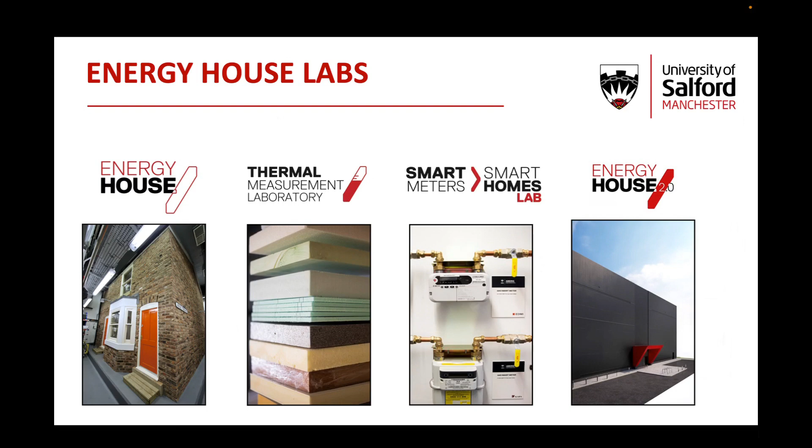Some of you may be familiar with the original Energy House, which was constructed in 2011. I'll talk a little bit about the work we've done there, because there's been a decade or more of work in there. And our recent Energy House 2 facility, which scaled up the original principle.

The reason we decided to go this way is, certainly around 2010, we were looking at things like the Green Deal, CESP, and we saw there was an opportunity to look at existing homes. I think still retrofit, particularly for the insulation market, is still a massive challenge. What we identified is there was a problem of assessing retrofit solutions, because really there's two ways of doing it: taking a piece of insulation and testing it in isolation, which we know is not really the problem - the insulation almost invariably works in that context. Or doing a field trial, which can be really expensive, difficult to do, and intrusive in people's homes.

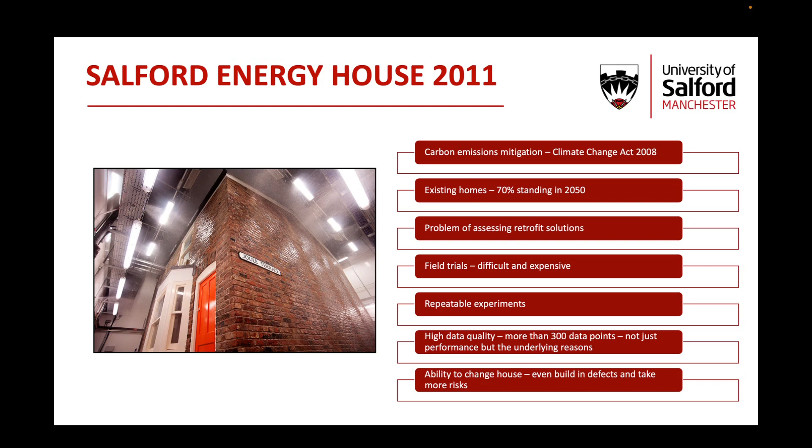So what we can do is conduct repeatable experiments by controlling the temperature. We can keep the temperature at a fixed state, un-retrofit the house, retrofit the house - two different states - and test them under exactly the same conditions with high quality data. This also gives us the opportunity to look at things that may not be proven as yet, or even look at the impact of defects.

We first started our first major project in retrofit with an organisation called Saint-Gobain. They're the world's largest manufacturer of construction products. This was to do a whole house retrofit using a variety of products. What we did was completely retrofit the house, baseline the house, retrofit the house, and take one thing off at a time to see the impact of the varying interventions. This for us is a great learning experience to try and understand what worked, how we measured things, and we've definitely moved on since then.

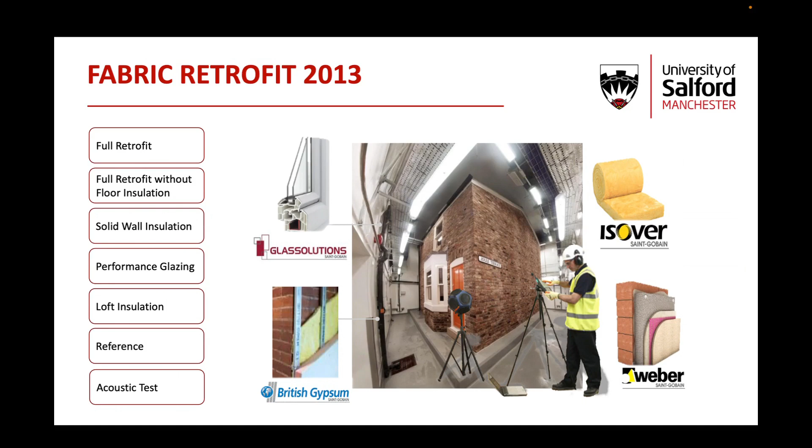Just to recap, we think measurement is really important. I think some of the problems we see in the sector are that we rely sometimes not on measured data, and not on a full understanding of how things actually perform in the field.

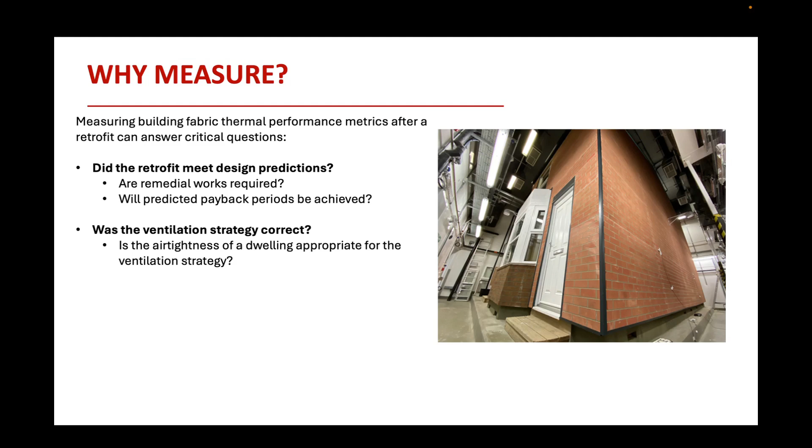So we have a number of areas where we think we can bring real value. First of all, does the retrofit meet design predictions? You can see a whole house retrofit that we've done. Are remedial works required? Will paybacks be achieved? Is the ventilation strategy correct? Is the air tightness of a dwelling appropriate for the ventilation strategy? And issues around health risks - pre-existing risks, have we introduced new risks? Surface condensation and mold growth, overheating.

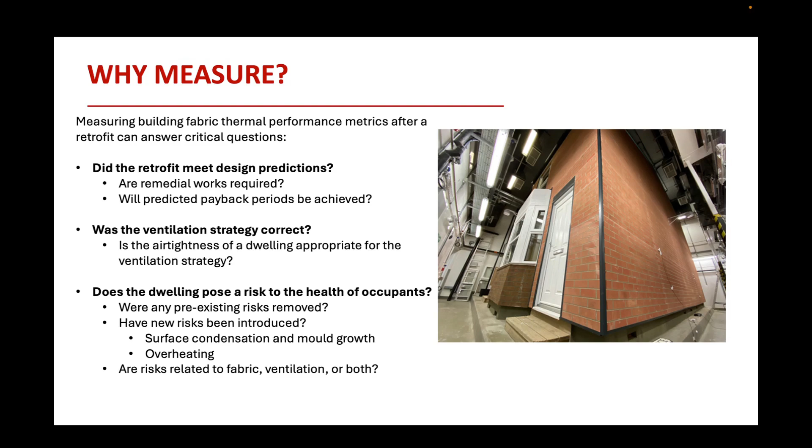Understanding by measuring what those risks are and coming to appropriate solutions for homes is really at the heart of what we do. And we do this in two key ways. I think the first is understanding the whole house heat loss, so the overall performance of a retrofit.

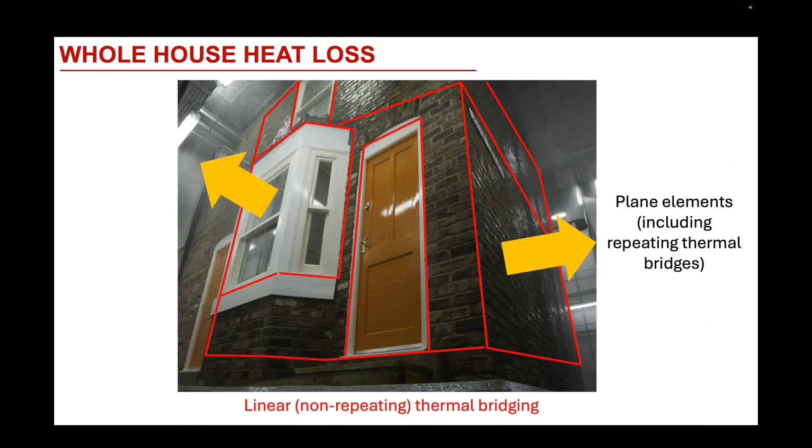That's some around thermal bridging - where are the linear thermal bridges in the install? Understanding plane elements and how they perform, understanding infiltration and air permeability. This gives us a number of methods, and there are new methods. There was a recent project from DESNZ called SMETER about how we can measure houses and understand that they're actually performing in the way that we want them to.

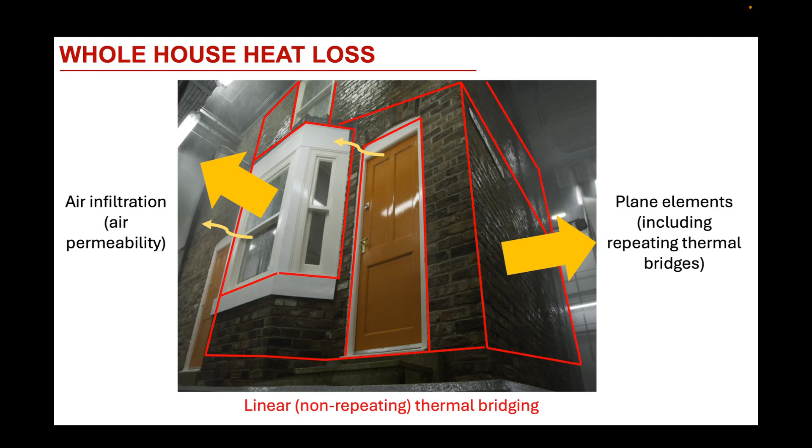That whole house heat loss approach can give us a single number of all the losses and can give you quite a good understanding of how the house performs in the round, and to see if it's meeting its design expectations. The other element that we look at is obviously thermal bridging and the junctions between the thermal elements.

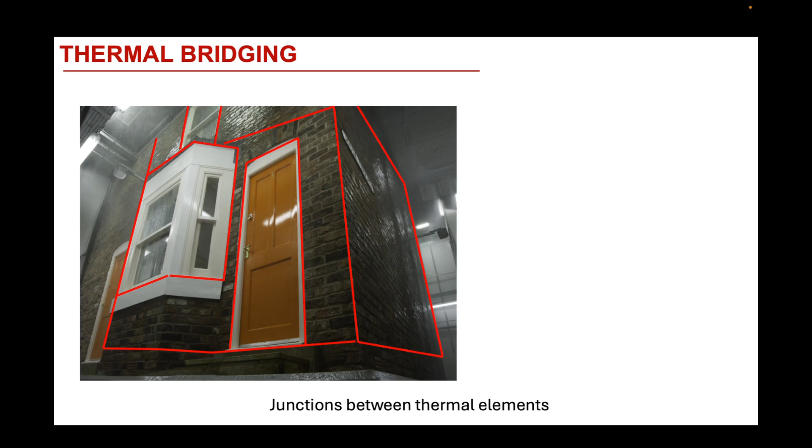So what we see is, sometimes the relationship between product and install, or product detail design and install, is essential. And I think what we do gives us the opportunity to look at how that detailing can be done and then how it might be delivered on site.

We use a variety of tools - the standard things like blower door tests, but we'll also use things like pulse tests. We'll use thermography, co-heating, U values. So we get this very, very data intensive full picture of what we're trying to do.

You can see here in some of the examples that we've given, this is the original there. There we can see the thermal bridges that occur from the design and delivery of a retrofit.

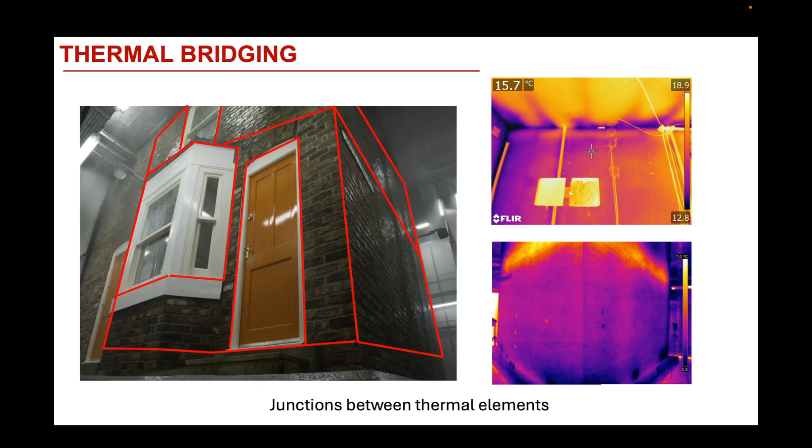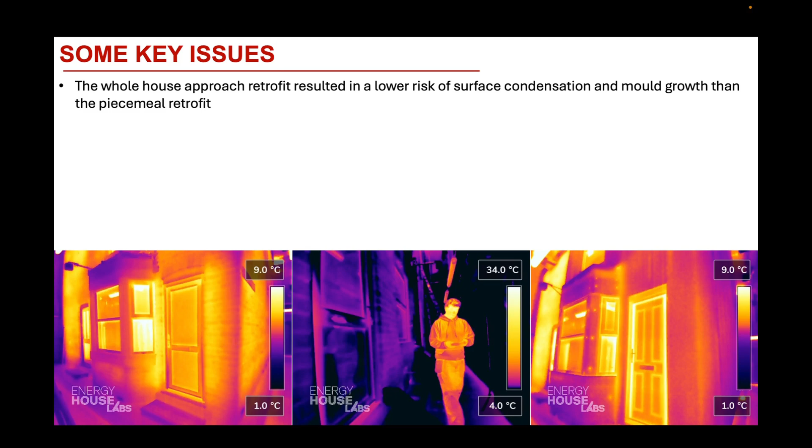So we've just finished a big piece of work. The report is not out yet, but it will be out before the end of the year. In that project we did 20 different retrofit scenarios - 4 retrofit scenarios and 5 heating scenarios, all done in combination. Some of the initial findings with the real detail will be coming hopefully before the end of the year, and if not in January.

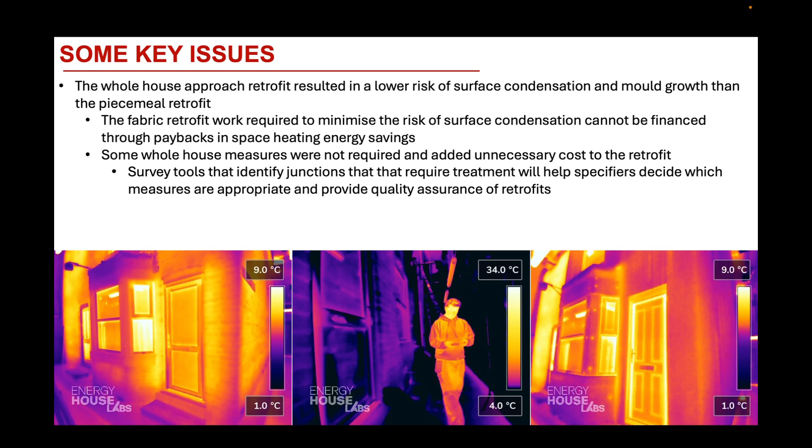I think the whole house approach does reduce the risk as compared to piecemeal retrofit. And I think the issue in terms of payback, it's very difficult to convert those paybacks into space heating energy savings, but actually we should be looking at the co-benefits in terms of quality, in terms of the safety and health of the house.

Some whole house measures are not required, and they did add some cost to the retrofit. In some respects, in delivering retrofit, really understanding what is necessary and what works is driven by understanding the actual performance of things rather than sometimes quite light touch model performance.

I think existing piecemeal retrofits can be converted to whole house retrofits. Piecemeal, in some respects, is not completely off the table, but there has to be an awareness of the thermal envelope and air tightness barriers. So some of the work we're doing is to try and understand what is appropriate - in some respects we suffer from under design, but we can sometimes suffer from over design as well, which actually adds unnecessary cost. Particularly if we're going to get into the owner occupier market, that's a big issue.

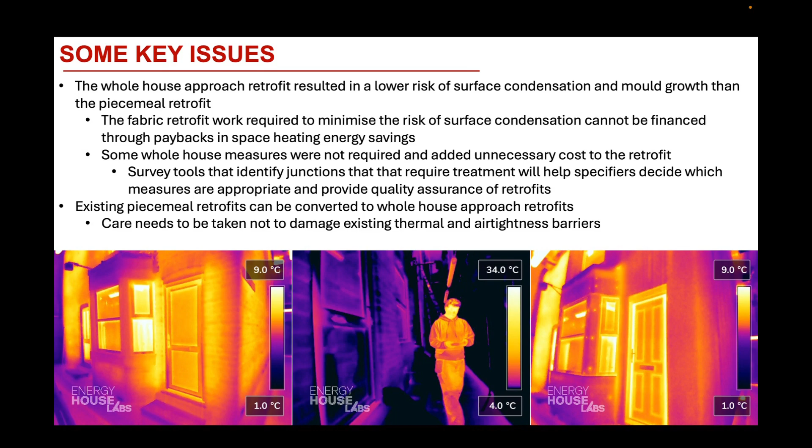We're not just doing retrofit, although it's a big part of our work. We're currently in Energy House 2 looking at 2 future home standards buildings. We're working with Bellway, Saint-Gobain and Barratt, and we're looking at the performance of those properties against the new standard that I think is due out of consultation in a few weeks.

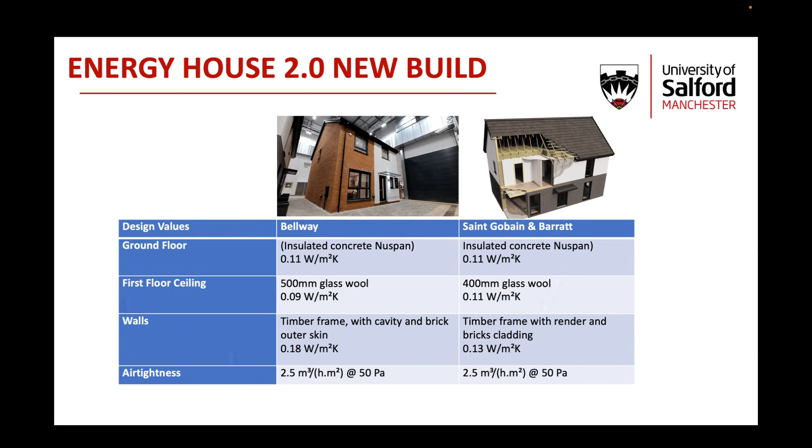And that to us is really important, because I don't think it's been something that the sector has done - to say, we're going to build this, does it work, how can we improve it, what are the installation risks? So we'll be doing baseline testing at the moment, and that will be out very shortly.

So that's looking at U values, aggregated heat loss, air tightness, and using that data to understand where the work needs to be done better. This measurement also gives us an opportunity to build much better models, so more accurate models, because even some of the dynamic models, the assumptions within them can be incorrect.

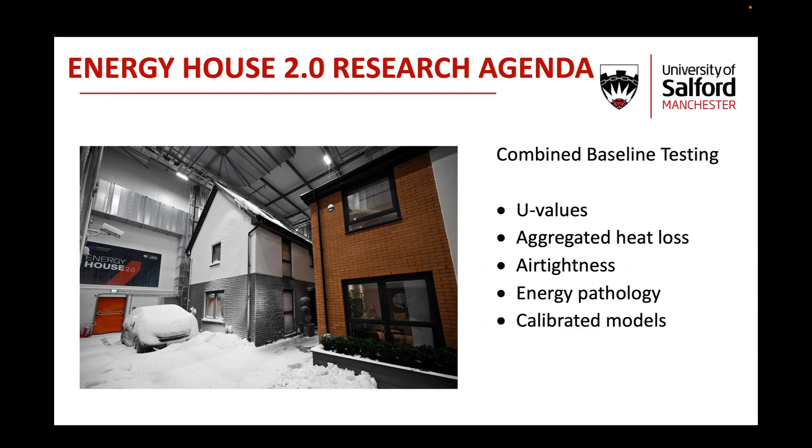So I think largely the message I'm trying to give is actually measurement's getting cheaper. There are places that do it really well. I like to think we're one of them. And actually giving that evidence to the sector about what the right thing to do is essential. And I would say, everything we do is with industry. We work with Rockwool as well, to understand how things are performing and how we can better deliver net zero, affordable, energy efficient and healthy homes.

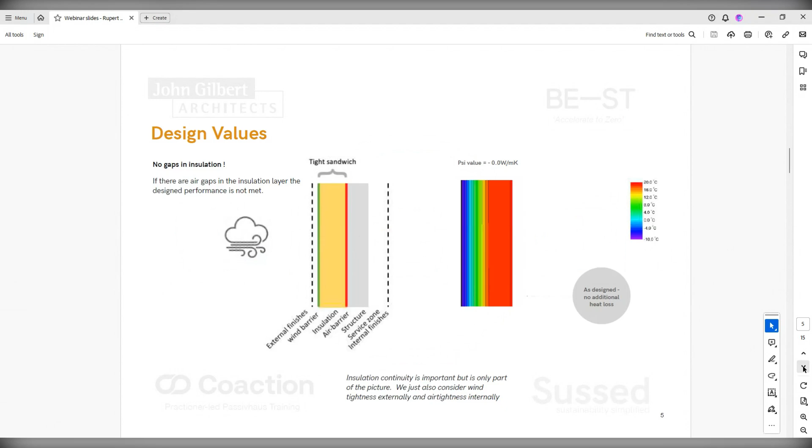Okay, so as designers, if we're using any methodology really, we're basing it on the assumption that it's put together. So if we go to the next slide, if we start to think about potential gaps in that insulation continuity, you can immediately see by the thermal bridge diagram that we get a lot of additional heat loss. So this heat loss isn't included in our design assumptions. So we need to try and mitigate it wherever possible.

I think in Passive House, we're really trying to go for no gaps. There's a reality of sites where there are practical tolerances. So 2 to 3 mil is an absolute. Anything bigger than that, it needs completely filled. Okay, so a through gap here, you can see the heat loss direct through to the structure. So it's quite a significant heat loss.

One of the tools that we've got, if I can go to the next slide, is trying to break that direct connection from outside to inside. So even if not being specific to the type of insulation, if we can break that air path directly through, then you can see there that we've got a significant reduction in heat loss. So by layering up the insulation initially, then in design parameters, this looks quite good.

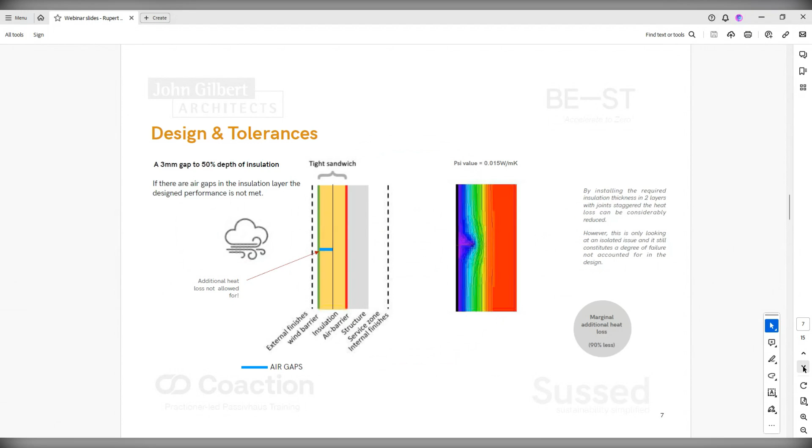The reality is that thermal bridge gap that we've got there might be reasonably insignificant on its own, just to a localized area. The risk is that gap joins another gap and joins another gap, and we get lots of different veins of heat loss running through the insulation. Okay, so next slide.

There's some really good work done on this. It's available on the Passive House Trust website by one of our co-practitioners at Coaction, Mark Siddall, and looks at the effects of thermal bypass. So there's quite a lot to it. There's a really good report. I suggest you take the link here and have a read through it.

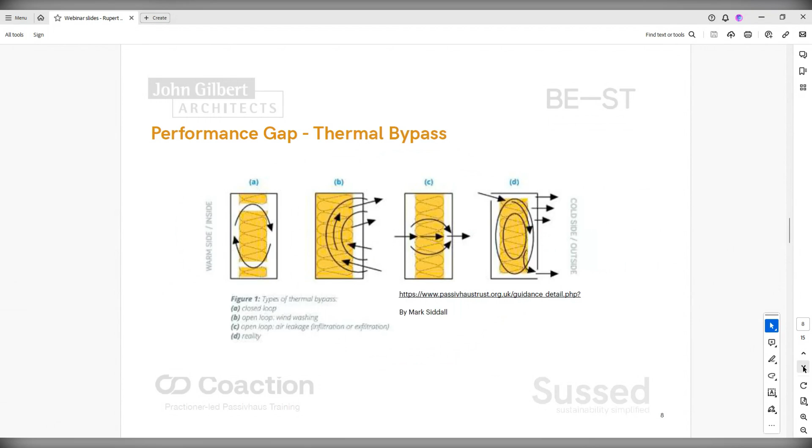But the impact or the devastation, if you like, on the performance of insulation by thermal bypass can be quite dramatic. You know, if we've got a design value, depending on the type of bypass there, you could be 500% more heat loss than what's actually in the design if we've got it poorly implemented. Okay, next slide.

So some examples of this, and this is where we start to think about different products for different uses and how we can actually put these together. So thinking about substrates critically, if we're going to be using rigid boards, how can we actually get those smooth onto a substrate so that there are no air gaps? You can see here finger width air gaps between substrate masonry as a result of mortar snots. The alignment of that block work, if you've got a long rigid board, how you're going to get that on. Essentially, if that gap there links to a gap through the insulation, then you've got a full bypass going on.

The middle picture is a retrofit. So left hand is a new build, middle picture is a retrofit, actually taken yesterday, where the substrate wall is a masonry wall which isn't smooth. And this is something that's happening a lot in the industry, or has been for a number of years, where we've not fully appreciated what the impacts of these air gaps are. So ideally what we want is a nice smooth flat surface for all of this type of insulation to be applied to.

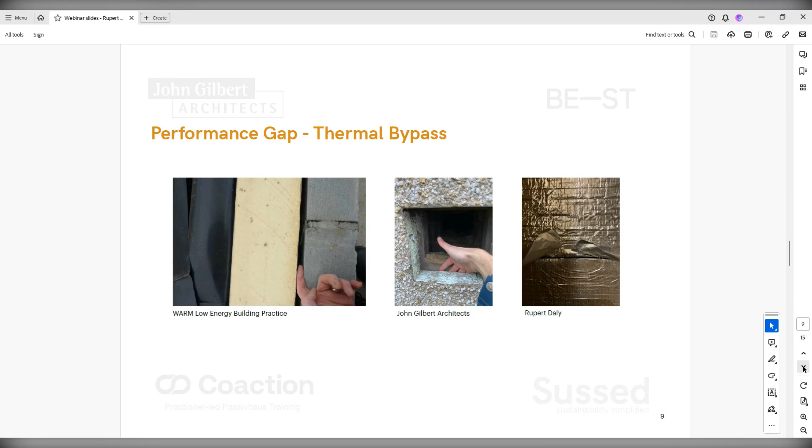The last picture there is just another thing where we're looking at, if we're going to do this work, we want to do it once and we want it to last for the lifetime of the building. So this example here is just some products, when they go in, they're still maturing and there's potential for shrinkage. So where a gap might have been installed tight, it can actually open up slightly over a number of years. So we've got to be careful that the products are fit for purpose for the lifetime of the building. Okay, next slide, please.

So how do we do that? Well, we need to think about the specification, the types of products, the densities of the products, how they can knit together, how they can interface to other geometry and components in the construction. So this example is from one of the projects that we've done through Sussed for other architects for the Passive House schools projects that are happening in Scotland at the moment.

And we can see an overlap here of the insulation layers, so staggered jointing, and a tight fit, because the insulation, whilst it has its own rigidity, it's flexible enough to actually squeeze around all of these profiles. So it's good. There's no performance gap relative to what's been designed, which is what we're aiming for, but there's still room for further improvement.

For example, in this build up here, there's a reasonable amount of off-cut material wastage, partly as a result of needing the battens there to get to the wall ties, to get to the outside for the overall thickness that was required for this actual building to meet the demand. Now products are getting developed, so we could do this with a newer, longer wall tie, which didn't exist at the time, and take away the battens, and more continuity means we might be able to bring down the overall amount of material that's needed in the first place.

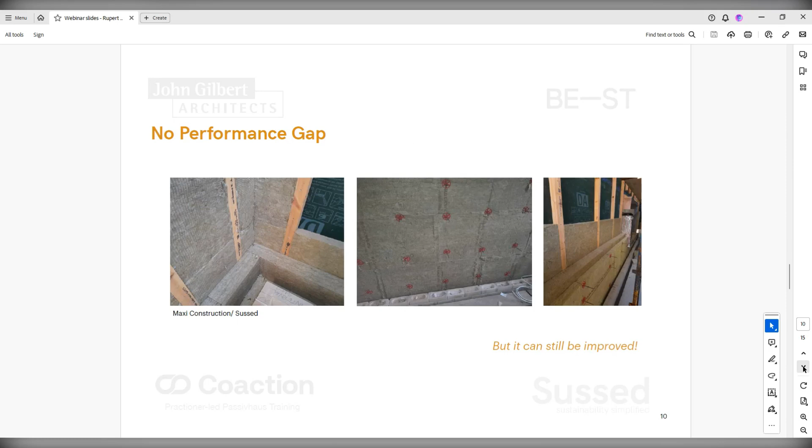It's not only about the products, it's also about the specification and the installation. So knowing which products work well with certain construction types. So in this example, we have timber I-joists used as a support frame for the insulation. There needs to be a bit of thinking about the geometry for that. Is the insulation flexible enough to get around the gaps at interfaces, and also can it be cut? It can be cut obviously, but getting it cut effectively, neatly, accurately on site is quite important.

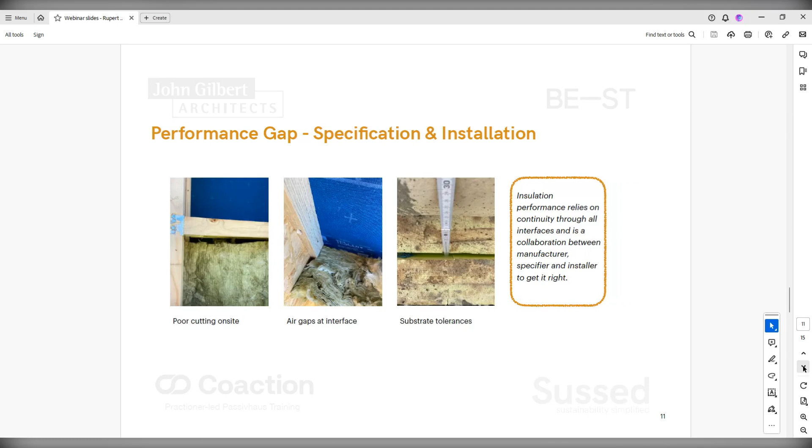The last picture here is really thinking about where it often emanates from, which is the condition of the substrates. So if we have a rigid board requirement, the absolute flatness of that substrate is critical to getting the boards to actually interface with each other and align up with the adjacent components as well.

Okay, next slide, please.

So we've got to think about how we ensure that the workforce can actually implement this work. So we've got skilled workforce, we've got semi-skilled workforce, and thinking about the right tools for the job, training the people to understand what is important about insulation. We don't just throw it up there into a gap. It needs to fit nice and snugly. We can do that really with the proper and suitable insulation products.

We can actually get these cut on site with relatively basic tools if there's a reasonable level of skill and care involved. There are other tools available which are more specialist, which can also help facilitate the accuracy of cutting. But beyond that, maybe we need to take a step further back and say, well, how can we actually reduce risk by minimizing the need for cutting in the first place?

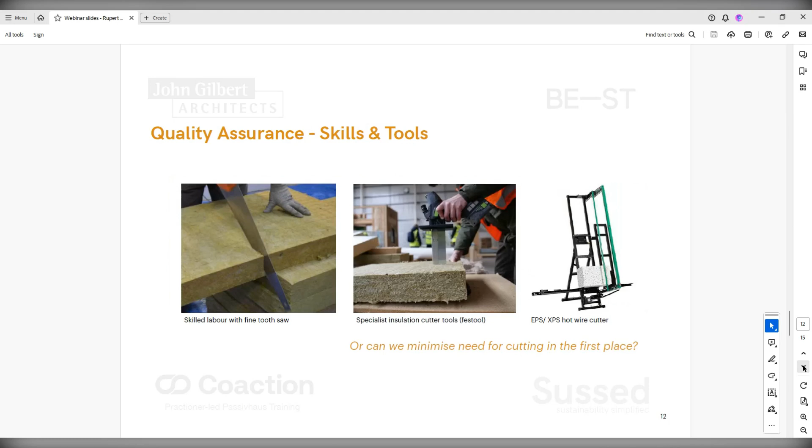How much time and cost can we save on projects if we can just take them straight from the packaging and implement them straight onto the construction with minimum number of cuts to get around the spacing for timber joists, for example, or cutting around perimeters, etc. Okay, next slide, please.

So what we're doing with Coaction and at BE-ST just outside Glasgow as a training facility is looking at that point at which we transition from design into construction. So we're collaborating between design teams and construction teams and having those discussions around various small rig builds. So we're taking the team through from, say, construction level drawings, looking at how you would sequence those, implement those, and then actually getting hands-on as a team to understand what's not communicated in the drawings, but what is actually important to ensure that we get this insulation continuity.

And then also the impending issues that we've got with time and cost as we try and improve performance. How can we minimize material wastage, labor time on site, and effectively bring in higher performance at a lower cost? Okay, next slide, please.

Then also, as a part of the methodology for Passive House, we've got third-party verification. So what gets designed gets assessed by an independent certifier. What gets built, the contractor needs to provide site evidence to ensure that what gets built reflects what was designed. So what's critically important is that it's not just a paper-based exercise to meet a particular national standard. It actually delivers what it can in reality.

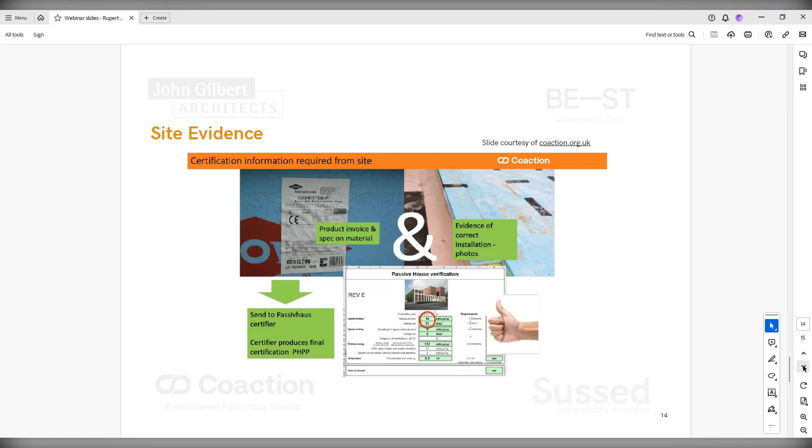So having this third-party certification and this crossover of evidence and communication between design teams and contractors is all part of the team exercise and collaboration. Okay, thank you. Next slide, that's me.

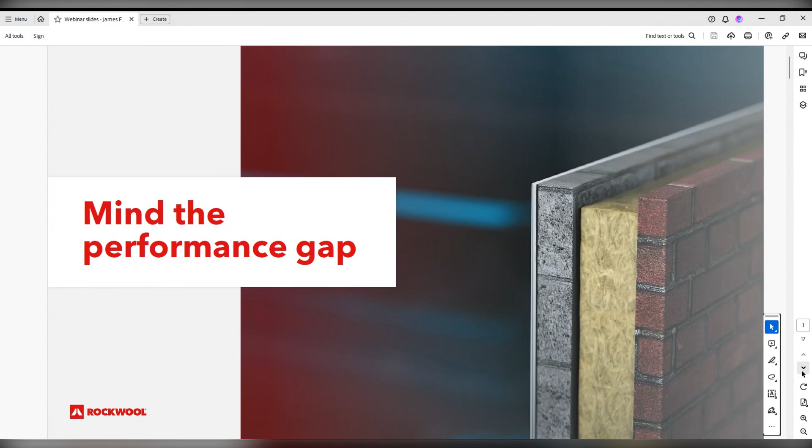The performance gap is not a new topic, yet it's something the industry is still trying to tackle. There's a lot of research demonstrating this issue between predicted and as-built performance, and something often referenced in technical studies is the work by a Belgian professor on the effects of what he calls thermal looping. In his study, he found that an air gap as small as 6 mm is enough to increase heat transfer by 158% of the design value. He did conclude, however, that this could be addressed through correct application and the importance of installation on site. Three decades on, the message remains just as relevant today as it did back then. Next slide, please.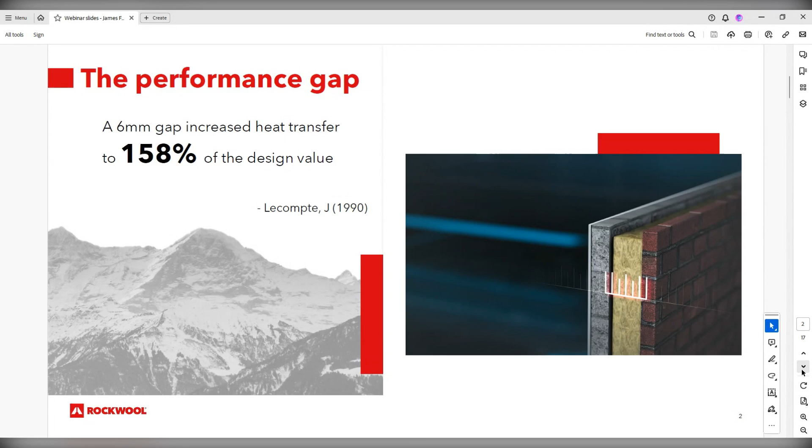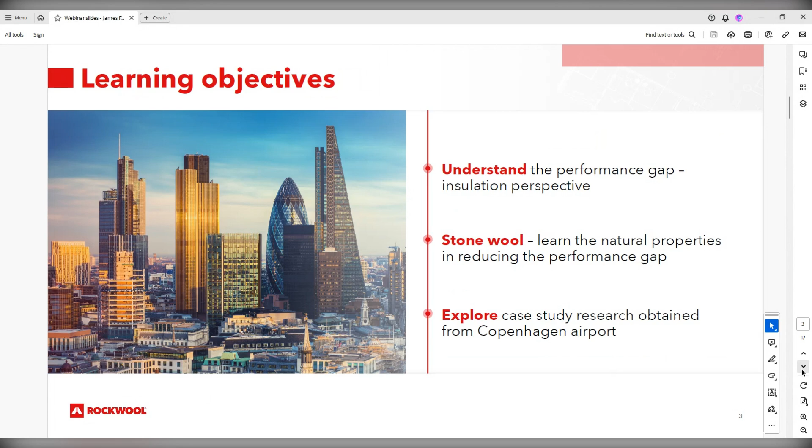This morning I'm going to cover three main topics. I'm going to share our insight into the performance gap and the role of insulation, and how that can support the country's ambitions to net zero. I'll be sharing insight into new evidence we've obtained from scientific studies demonstrating how stone wool insulation can help naturally reduce the performance gap. And I'm pleased to share evidence from case study research we've obtained from Copenhagen Airport demonstrating the long-term performance of stone wool. Thank you. Next slide.

To start with some context, it's well documented how net zero places greater emphasis on the fabric of a building. As we look to decarbonise the grid, our building fabric needs to work harder for longer. We see this addressed through recent uplifts in thermal regulation across the devolved nations. Under new regulations, for instance in England, we know CO2 emissions from new build homes must be 30% lower than previous standards. And with the introduction of the Future Homes Standard and low carbon heating systems, it's important that buildings are designed with high levels of energy efficiency to ensure the heat generated stays within the home.

To ensure the government will meet its net zero commitments, it's essential that any new homes planned and delivered now will not need a significant upgrade by 2050. That requires many new low carbon homes to be built, and they must perform as expected. Insulation combined with other energy measures plays a major role in reducing the energy consumption of buildings. By improving insulation standards, building owners can ensure they reduce their operating costs while making buildings more sustainable and comfortable to live in. Next, please.

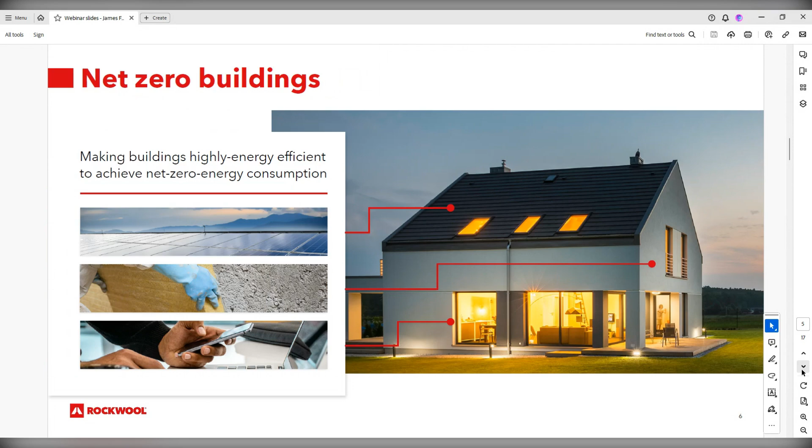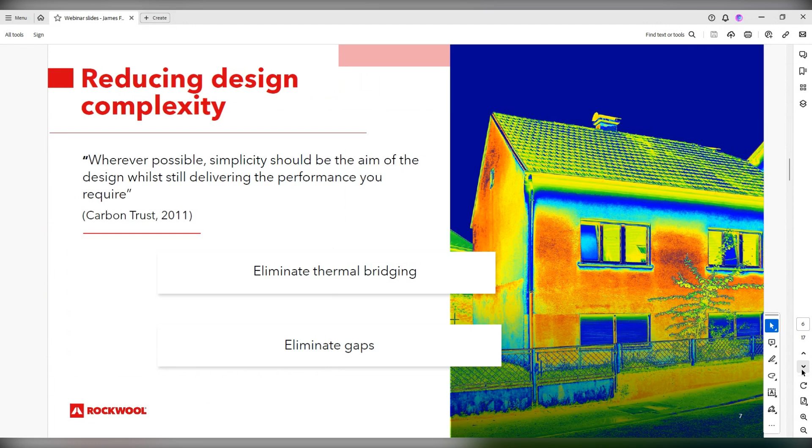When doing our research for this presentation, we looked at many different literature reviews, and we found research by the Carbon Trust showing there's a temptation to install as many low carbon technologies as possible, where simplicity should be the aim of the design. It's also important that low carbon technology will only work if the fabric is performing. Looking around the literature review, design should focus on eliminating thermal bridging where possible and eliminating gaps. We know that anywhere air can enter or escape will reduce the overall thermal performance of the building. Next slide, please.

Many new homes are expected to transition to heat pumps, potentially increasing energy costs. Research indicates the unit cost of electricity is 3 to 4 times higher than gas, and that's going to result in higher fuel bills, of course, placing even more importance on the fabric of the building.

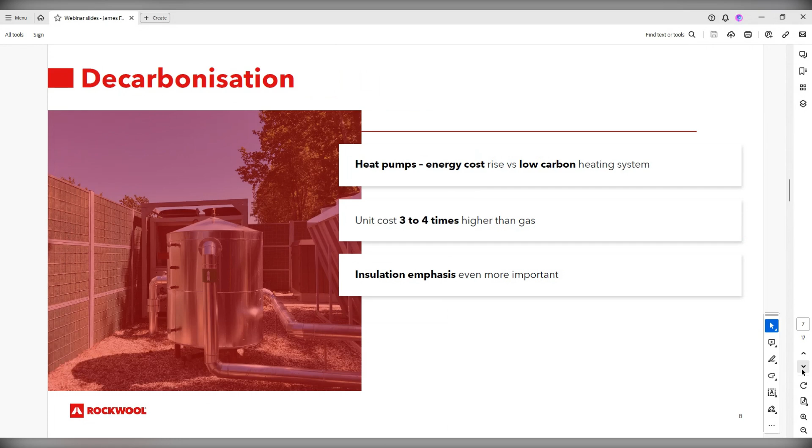At Rockwool, we advocate for a fabric first approach, getting it right first time. But if we look at the effects of incorrectly fitted insulation, they are quite staggering. We know it's a common issue, and tests by the BRE back in 2008 indicate that poor installation can in fact increase the U value by as much as 310%. The common issues we find are gaps forming between insulation, lack of insulation and air barrier continuity at junctions, poor insulation in lofts, and debris and mortar snots forming in the cavity. These are often areas not visible to the homeowner, but they will have long-term implications for the fabric of the building. Next, please.

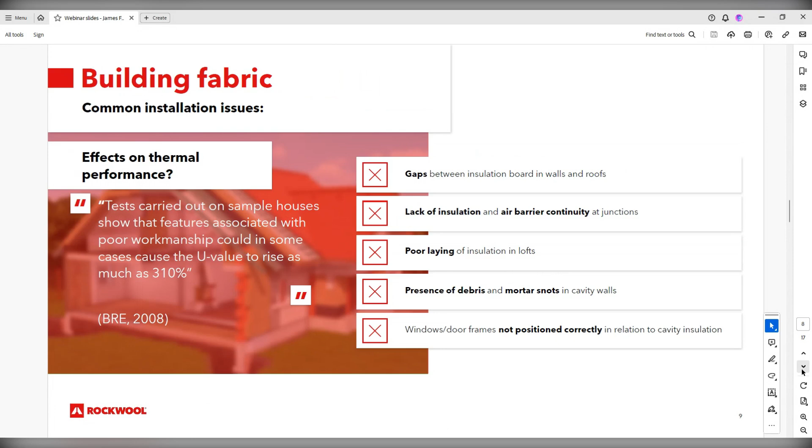So that was, I think, what can we do about it? This was summarized nicely in Tom Dollard's new book recently: even though designs might look good in AutoCAD, they might be difficult to achieve in reality, and often the best solutions are products that are easy to install. There's a lot of good work done on this, looking at robust measures and easier installation processes, helped partly by Part L guidance with photographic evidence, and supported by new standards like building performance evaluation.

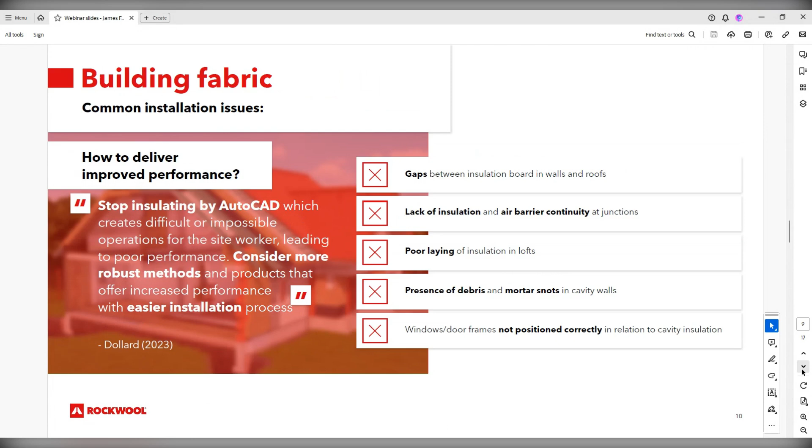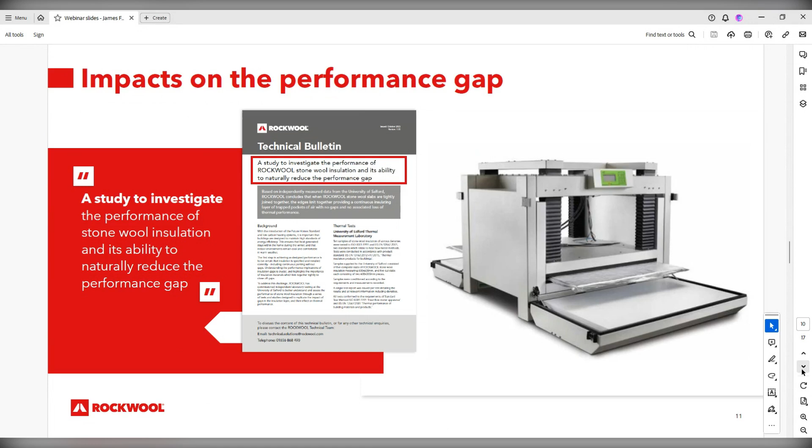With that in mind, understanding the impact of gaps was key for us here at Rockwool. In response, we've conducted our own investigation into the performance of Stonewool and its natural ability to reduce the performance gap. We wanted to learn two things: what was physically happening when two pieces of insulation joined together, and what impact that had on thermal performance. So we conducted a series of tests and studies to replicate the impact of gaps in the insulation layer and the effect on thermal performance.

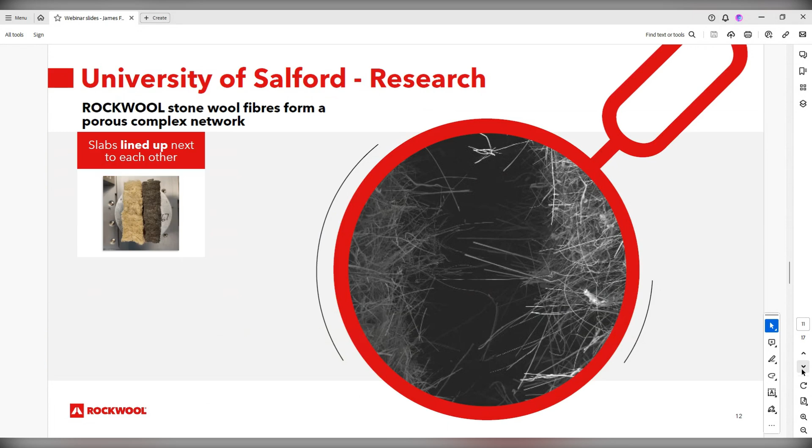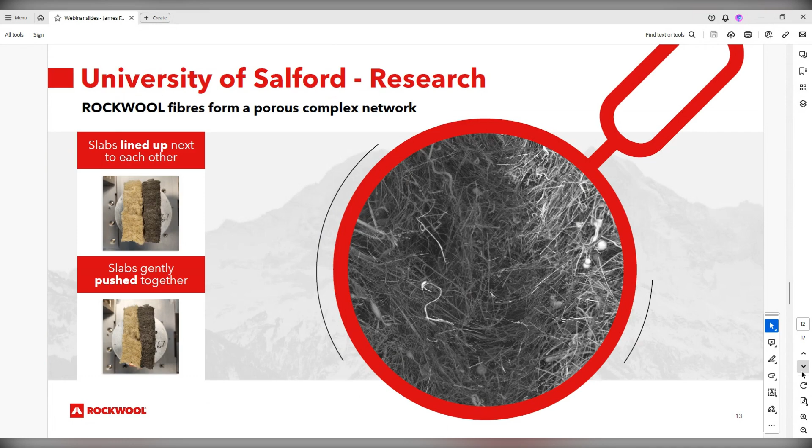The first part of this was to analyze the material at the microscopic level. When viewing the two slabs under a microscope, we can see quite clearly there's an initial gap. When these slabs are gently pushed together, we see that initial gap close. Effectively what's happening here is two pieces of insulation knitting together, and in turn that's providing a continuous insulation layer.

So we proved that it's working. We then sent samples to the thermal lab at the University of Salford, and the results of these tests show there's no thermal loss of performance between a whole piece of insulation and a cut piece, across a range of densities. What we concluded is that when stone wool slabs are tightly joined together, the edges knit together, providing a continuous insulating layer with no gaps and no associated loss of performance. The results of these studies are summarized in a technical paper which we'll be publishing shortly after this webinar.

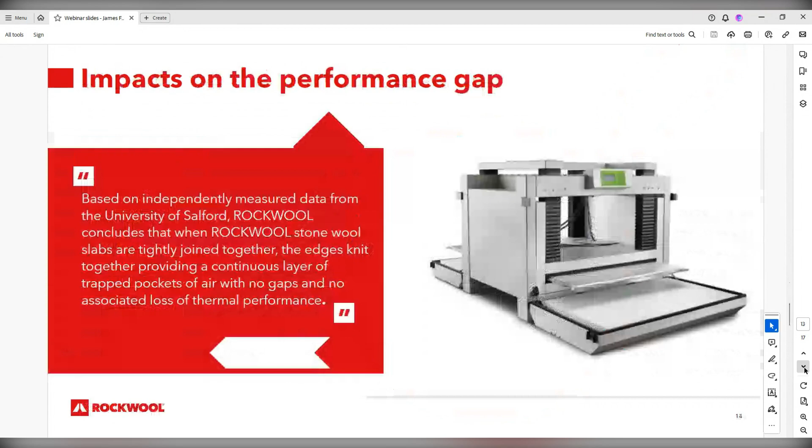Earlier I mentioned that at Rockwool we advocate for a fabric-first approach, getting it right the first time. That's only effective if the materials you're using deliver long-term consistent performance, and that's going to be key if we're to hit our net zero commitments. For continuing performance, dimensional stability is key. Why? Building materials naturally expand and contract over time, which can lead to the formation of gaps and voids. Stone wool maintains its shape and properties over time and has the resilience to accommodate building movement.

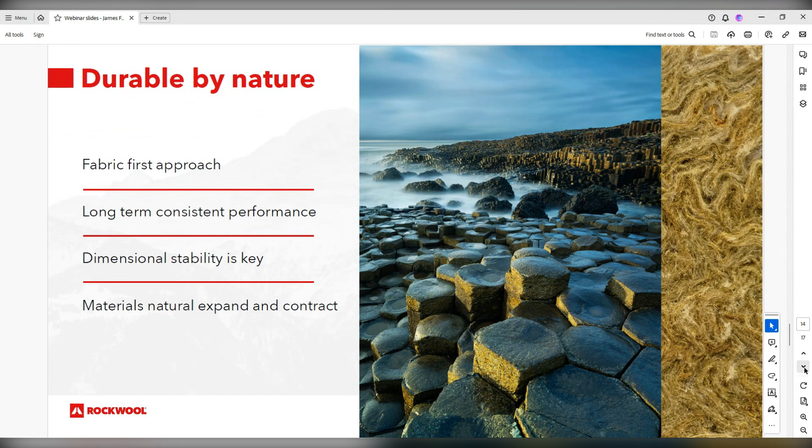We recently found a great example of this during a renovation project at Copenhagen Airport. This hangar was built in 1958 with 75mm of insulation in the facade, and that is the oldest sample of stone wool product we have in use - the previous one was 55 years. Our team in Denmark worked with the Danish Technical Institute, who carried out several tests. What they concluded was that after 65 years, the performance had not diminished at all - it was as good as the day it was installed.

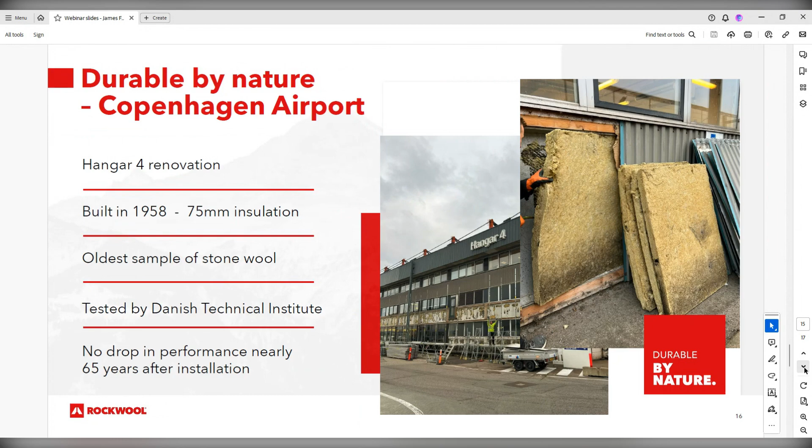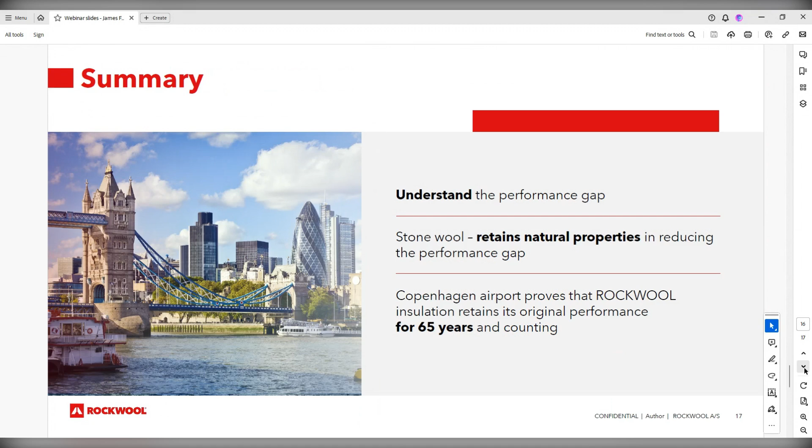So I'm just going to summarize. Thanks for the opportunity to present to you this morning. We covered very briefly the performance gap and the role of insulation. I've shared some insight into how stone wool can naturally reduce the performance gap, and the case study from Copenhagen Airport. We have a CPD available in the new year that goes into this topic in a bit more detail, so if anybody would like to join that, please drop a comment in the chat box and we'll pick that up. Thank you very much.

Brilliant, thank you so much James. And again, thanks to Will and Rupert for your presentations as well. Let's get into this Q&A.

I've got plenty of questions to kick things off with, but one that occurred to me is something I want to pick up with all of you. Sorry, I'm just pulling up my notes - I was typing away furiously while you were all giving those presentations. One of the things I wanted to ask: you've all spoken about considering the long-term implications of the performance gap in insulation - how can the industry best balance innovation and reliability in material specification, particularly to ensure sustained performance post-occupancy? There's been a lot of talk about innovation, but how do you balance those two levers? Does anyone have any particular thoughts?

I don't want to pick on anyone. I mean, I don't mind, because we do a lot of measurement, and I think the performance gap is, it's not just that we've modelled it, we measure it, and there is the gap. We've done work on this - actually the models have gaps, and measurement has gaps. All measurement has uncertainty, so it's probably a bit more complicated than saying here is the SAP, here is the measurement, or it's wrong. You've got to understand the nuance about what you're doing. But what we are seeing is things getting cheaper. So even if you're not within 5% or 10% measurement error, what you will understand is what needs doing a lot better.